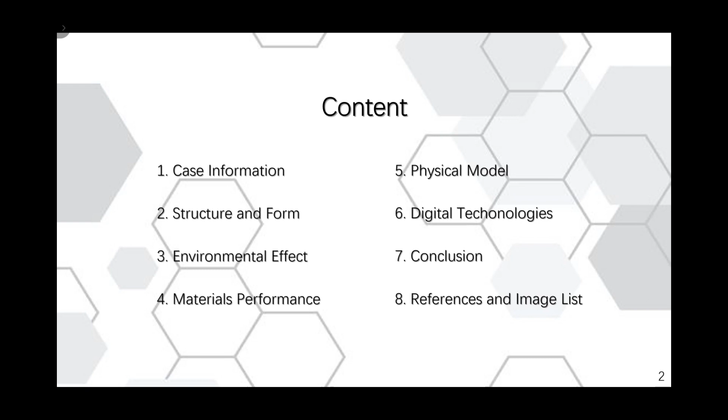My case study is about CITA Hybrid Tower. Here's the content. I will present from the case basic information, then go through every key design element in this project. First of all, the tower was built in 2016 with an area of 7 square meters and a height of 9 meters, and it was located in Portugal.

The stakeholders include the design team CITA, Center for Information Technology and Architecture, as well as its knitting company AFF, and so on. The tower was built with the historical background of the traditional thinking in architecture, which is to understand the building as a static appearance that is not affected by a change of environment. But this tower explores this idea of a fluid architecture, a resilient structure that adapts under environmental changes.

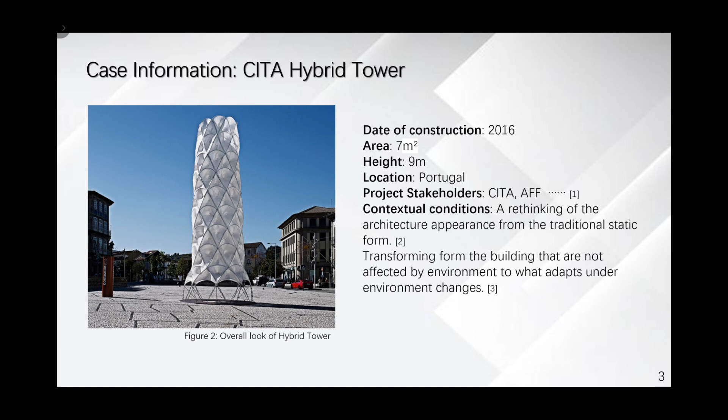This tower possesses a very unique structure and form from both outside and inside. For the outside structure, it is generally constructed by two components, the bent GFRP rods and a custom-made CNC knit as a membrane covering the whole surface. It creates a series of single triangle units to generate the building surface, and each unit is sunken in the center, and by stacking these upside-down units, the whole surface has been generated, which is very stable and also lightweight.

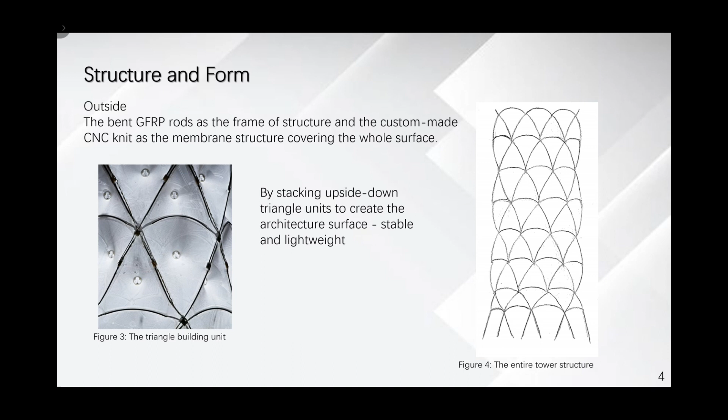For the inside structure, it is quite complex compared to the outside, as there are lots of metal rods and rings within the building, and the purpose of this is to give the tower an inner support, so as to hold the whole surface. This is a key design method to make sure of the stability of the building, as well as keeping it lightweight, and I drew a series of diagrams to explain this.

The left diagram is the view from the top of the tower. In this diagram, the straight lines mean the metal rods, and the circle means the inner surface of the building. So we can see the rods hold the surface horizontally to keep the stability of the tower, and they gather finally at a point in the center. And the diagram at the right shows the same work in the vertical direction, with these arrows meaning the direction of force.

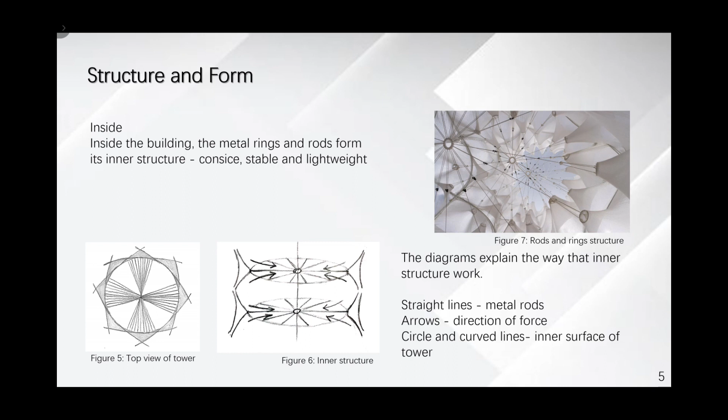And this unique structure gives it a great environmental effect. This uneven surface increases the contact area of wind, and also, with the help of the membrane material, this can make it easier to be changed by natural wind. The diagram below shows this impact. In this diagram, the big arrows represent the wind, and the small arrows represent movement of the surface.

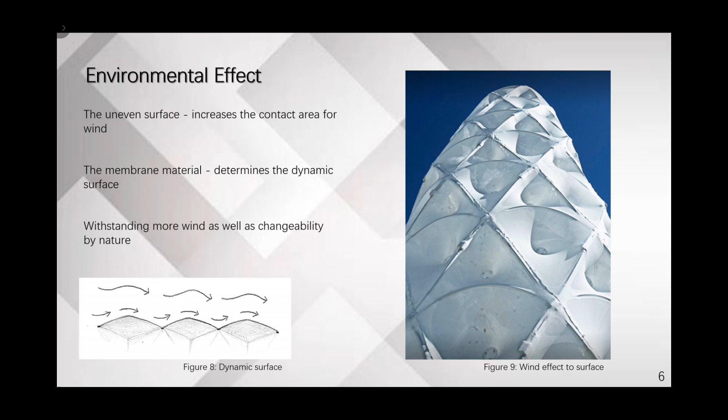So when there is a strong wind blowing, the building surface can move following the direction of wind, and this is what we call a fluid architecture, which possesses a better performance to adapt with the environment, as well as withstanding more wind force, both vertically and horizontally.

The materials used in the tower are highly customized. Therefore, they usually have a better performance which fits its structure. And as the main material used in the tower, the production of the membrane has been innovated by using a CNC knitting machine. And by using this way, the membrane can be made in a shorter time and with a better economic benefit.

The knitting machine also provides accurate control of the material. And with these advantages, architectural details can be integrated directly into the membrane materials, as the picture shows at right. The connections of each section's materials are produced together with the membrane smoothly and completely.

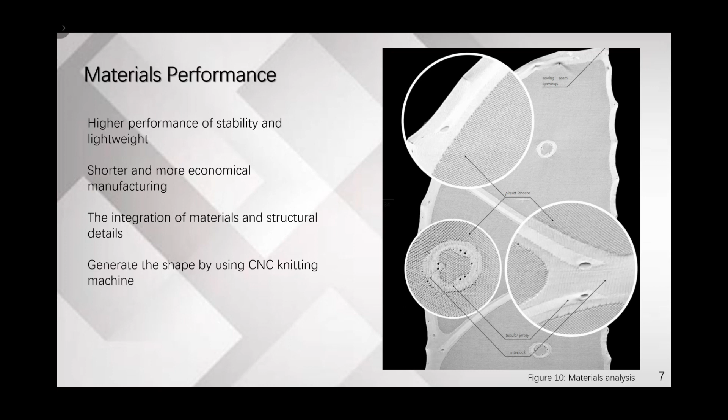So there are basically two digital technologies, including the use of computational tools and the CNC knitting technique. The design team developed a set of related computational tools in order to design and specify these material systems, and this created a design platform for the tower.

For the CNC knitting technique, as I mentioned before, it is the key digital method in the production, which is a combination of traditional CNC technique and knitting materials. It works by following coded program instructions to create textile. This is a more accurate and faster way without manual operation of the machine.

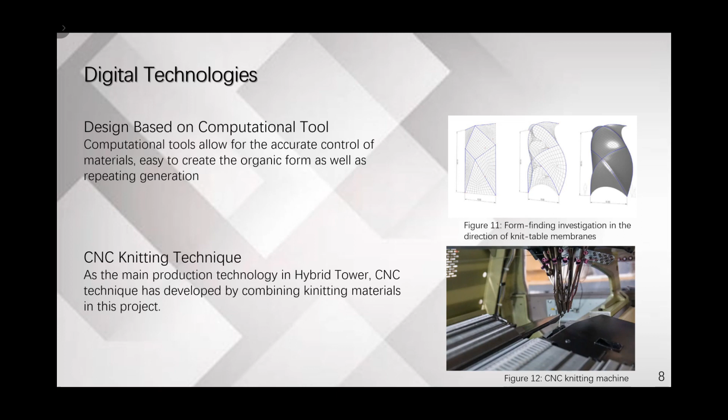The CNC technology basically works at the step of material creation. It plays a role in production and directly controls the materials. And with this help, the materials can be carried out smoothly and rapidly.

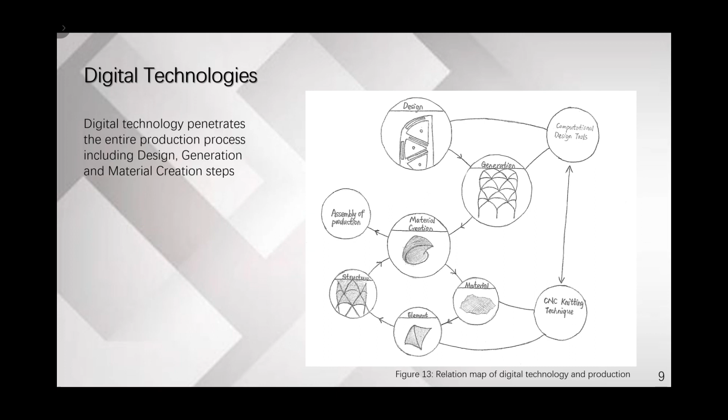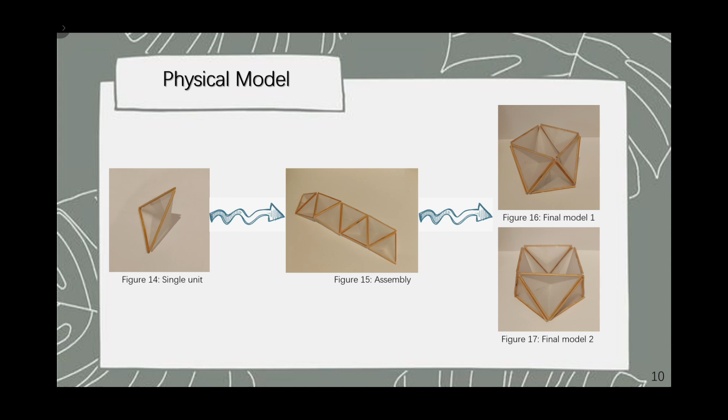As a conclusion, CITA Hybrid Tower is a pretty successful design, combining digital technologies and building construction. It opens a new avenue for textile as a building material to create soft structures. And I've learned that computational tools can give the building a new life, as they can break the traditional recognition. It gives a new meaning, whether in aesthetics or practicality, or even the intervention in old building environments.